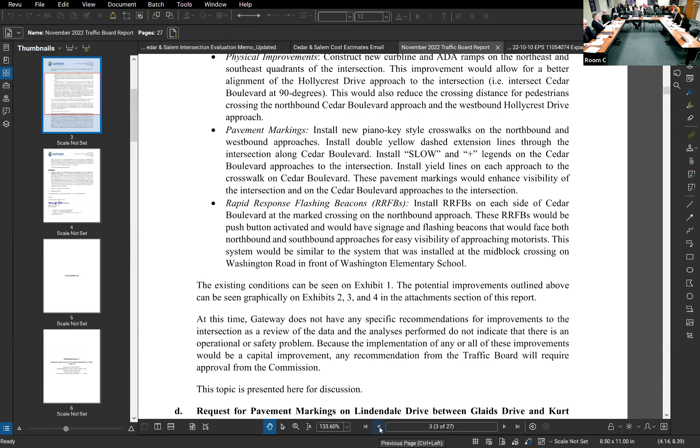Was it random or were they - there was the highest number, and it's in my traffic board report. I want to say the highest number was... here it is, here's crashed, I'm sorry. So there were 9, and other reportable crashes - 2 involved collisions with pedestrians.

Again, one was the one, and then there was another one, I believe, that might even have been the crossing guard. And then seven of those 9 were angle crashes involving a motorist who was going straight across Cedar Boulevard from Hollycrest. So that may have been a function of that.

If you're in the right lane, is that the lane that goes straight? Where either cars that were parked along Cedar, or someone next to them trying to turn left, and then they tried to go straight across Salem. So 7 of those 9 were that movement.

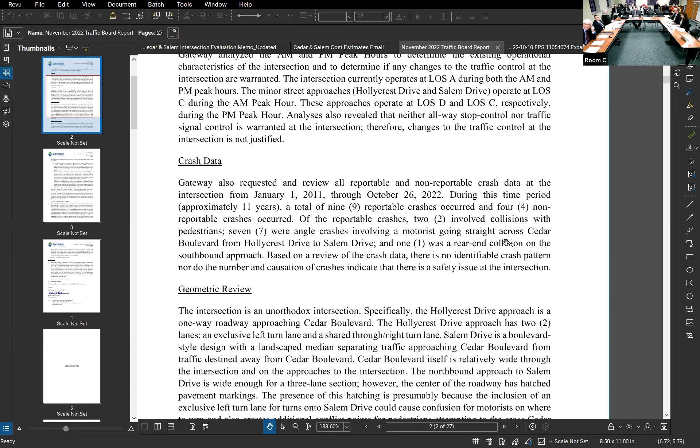One was a rear end, which was - if I remember correctly, if you read the report - somebody stopped in the southbound direction to let a pedestrian cross, and the person behind them was looking at their phone and rear-ended the person who stopped. Not necessarily a geometric problem. Correct - and reportable crash is a bit of a misnomer because they're all reported, but if a car is damaged or has to be towed, that's what qualifies as reportable. So there's the reportable, and then there's the non-reportable.

Terminology could be better - reportables have to be reported to the state. I was just curious, from the police report standpoint, that way we get the actual excuse if there was one, or the actual factual - witness statements are under that.

So from all of that, essentially what we said to the traffic board was, qualitatively and geometrically, there are some things here that are unorthodox. Some consideration would be given to improvements or modifications to the intersection to enhance pedestrian experience and safety, and enhance awareness of motorists traveling through the intersection.

So I'll step through each one. This first exhibit shows what we've already looked at on the aerial, plus some of the existing signs shown on that plan. The first thing we talked about - let me go back to this one - it's already posted and in the ordinance, no parking from where my hand is up to the intersection.

And then through the intersection and over to here, that's already posted no parking, likely because the through traffic was shifted over due to that hatching we discussed, and the unorthodox nature of where you have to turn left. Also, because Cedar Boulevard bends horizontally back away from Hollycrest, you don't want cars parked along this curb blocking the sightline - there's a sidewalk combination of things there. We also don't want pedestrians to have to walk out in front of a parked car to see if oncoming traffic is coming. So there's no change here, but parking along the curb for about 150-200 feet leading up to the intersection, and somewhat after it, is already restricted.

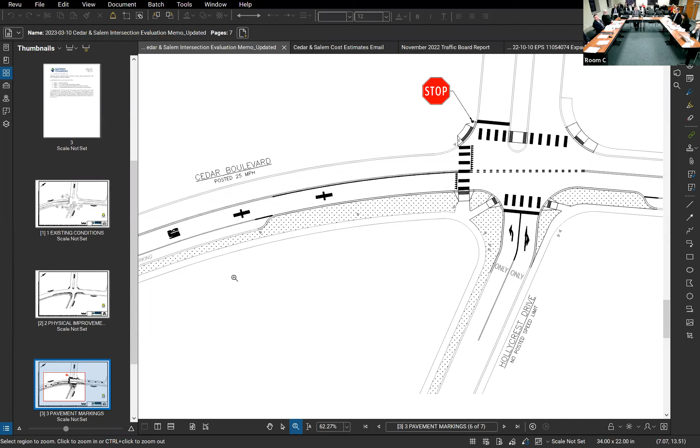And then another thing that's been shown to be very successful in reducing crashes at intersections—it seems simple, but it just raises awareness. If you look at the ground when you're driving, like I do, you've probably seen them around. One example is Orr Road and 19 and Upper St. Clair, right across from their fire hall, at the church there. You'll see, if you're driving on Route 19 approaching Orr Road, there's slow legends on those approaches with plus symbols, all white, thermoplastic. So as you're approaching it, it's just another thing for a motorist who's maybe not paying attention—they see these things, and at least it puts the thought in your head: okay, there's an intersection right up here, there's an intersection coming up.

So it's a cheap thing, and PennDOT's been putting them in a lot of places, and they've become a little more popular around. So just another thing for the motorists to give them awareness that they're coming up to this intersection, in addition to the enhancements to the pavement markings at the intersection itself.

Mike, did you look at, on Hollycrest, down where if you go left right there, down a little bit to the right, there's always parked cars there. So I'm just worried that evening it up to a 90-degree makes that easier to make the turn. I'm just wondering—that's a church there, right? Just to the, yeah, yes. There are always cars parked where that Hollycrest is. I just wonder if it makes it harder.

It doesn't look like you're narrowing it. No, but just knowing that there's always cars there, it just looks weird with that kind of 90-degree on the right side. It looks like maybe there'll be less room. I'm just worried if you have cars making that left and there's cars parked on the right—should we have no parking a little bit there? Maybe we need to push back the no parking sign where some of those cars are parked now, which then also may be problematic.

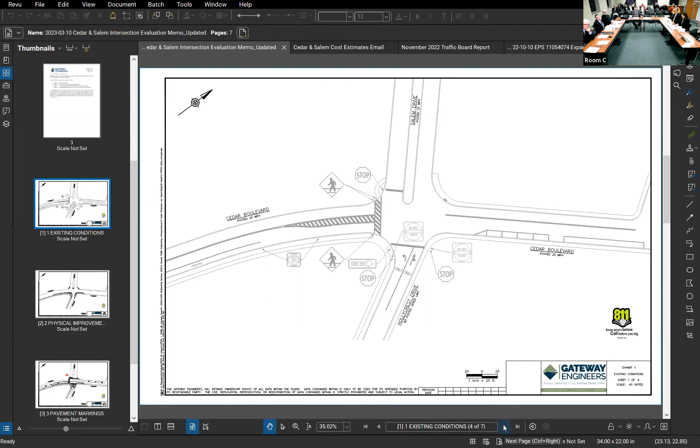Yeah, it might be that—I don't know where the no parking starts, but obviously nobody's hopefully parking in the lane that's marked. But there's also room that they could go around. Once you get to the point where you have a couple cars stacked on that left, it would block that right side with the way parking is. The answer may not be that there's any problem with this, because I think it looks good. It may be that we need to move that parking back a spot or two for better parking.

Signage for no parking - the bump out shown on that lower corner of Hollycrest is going to tie into and shorten up the crosswalk that exists now. There's a catch basin right there, so you'd have to do something with that. It was put in probably at least 6 years ago because that's an area that gets significant stormwater, so we added a catch basin there for additional capacity. We may just have to look at the location of that catch basin related to a bump out of that corner.

Out on Cedar - I switched to the aerial. You didn't see it, but I'm on the aerial here. If you pull up Hollycrest on that area, you'll see what I mean.

We're wondering, why not just make it one lane if cars are parked there anyway, taking it down to one lane.

This was just an idea, giving some initial thoughts, and then we could plan it out at a high level. This was concept stuff as a first shot at the traffic board, and through the discussion they just said, let's push it up to the commission. So it wasn't a whole lot more detailed - layouts and concepts were put together for that, and there's a lot of cars parked there now.

So Mr. Gurley, what do you think? I was going to say, if you pull up Google and the street view, you'll see exactly what I'm talking about - drop it right there, pull back from the church and look that way. It's not there now, of course.

But you can see this sign where it says 3-hour parking right there, and you can see the yellow lines up at the intersection. This has been my experience too - you'll see cars stacked up right to that point, one lane anyway, and that's allowable. You saw the sign - it's posted, parking allowed right up to where the curb has been marked with yellow.

That would certainly be a consideration. I have to imagine it's convenient because people can jump right out of that onto the sidewalk to go into the church - church, tennis, school.

So would this intersection be a good candidate for a roundabout? I thought about it - do I have enough space?

You know, roundabouts aren't great for disabled people. I'm sorry, but they really aren't, because disabled people need the traffic to stop and time to get across in a wheelchair or with a cane or a walker. I think the fact that you're pulling these curbs out into the street and essentially making the street appear narrowed is going to have a wonderful traffic calming effect at this intersection, which I think is going to be very valuable. There's a lot of speeding on Cedar Boulevard. I just don't think roundabouts are the answer to everything, especially not for disabled people.

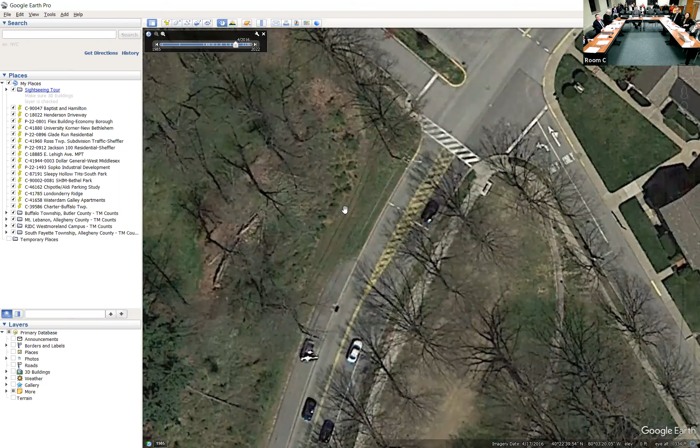Because what I'm thinking about is creating... from this intersection down to Greenhurst we have lots of pedestrians. People park and walk across the street and it drives me nuts. I drive through there all the time. It drives me up a wall, but the reality is we've provided parking on that far side, which means people are cutting across all running across.

Which is dangerous. And yes it's posted 25, but if I'm not creating some experience where people are actively thinking 'I am in a pedestrian heavy zone,' they're just gonna keep blowing through this, which I think this is a great step. But I recognize this is one piece of a broader puzzle, since I've got the parking down the hill, so I want to potentially create some kind of bump or experience that makes people realize this is a pedestrian space.

The other thing I'm thinking about is I want people walking up to La Gourmandine and to CVS and those places, and how do I want them getting there? Chances are I want them to cross here and then walk up to the intersection, if they were once upon a time going to Dollar General. I want them crossing sooner rather than up at that intersection up the hill, so how am I promoting crossing here so I'm not creating more density of activity up at that next intersection?

I mean this would obviously be a lot more expensive, but if we move the parking that's currently on the other side and put it on the high school side, right? Parking on the mountable curb is on the other side, and we turn more of the lane there and put the parking on this side.

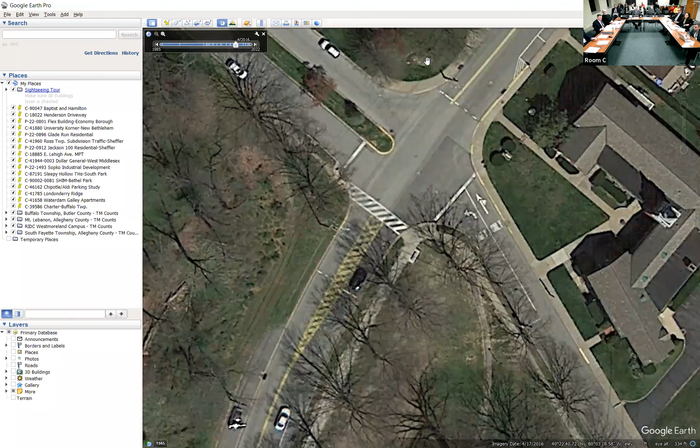Can I jump back real quick to the other one, and just to touch on the last point, also to Commissioner Flint's question about a raised crosswalk - I have to look at that a little closer. Okay, that's fair, we're throwing you ideas, you're brainstorming. There may be other issues that come up with a raised crosswalk.

Typically, a raised crosswalk is at a mid-block location, not at an intersection. If you're going to raise something at an intersection, you have a raised intersection, and that's the whole intersection, all four approaches are raised through it. So let me look a little bit closer at that.

And there's also some volume constraints to it too. There are certain thresholds. If you have a certain high volume of vehicular traffic, then you don't want to consider something like that.

Just one comparison I wanted to throw out - we collected some data at 19 at Cedar, that's Washington Road uptown, as part of trying to get PennDOT to allow us to close the curb lane for some extended hours. From 7 to 8 AM at that intersection with 4 lanes, the amount of traffic in one hour in both directions is as much as there is here in the evening peak hour.

Vehicular traffic? Vehicular traffic. So there's a lot of traffic coming through.

Can I add to the list, as long as you're checking on that raised crosswalk - if we can't do the raised crosswalk at Holy Crest, can a raised sidewalk be done with these people crossing by the tennis courts? Put something there. Essentially, not at this intersection here - this cannot be a raised sidewalk.

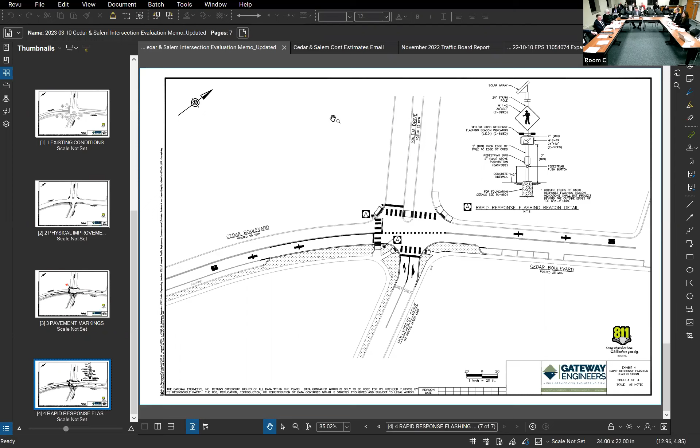You said 175 for all three, including the lights - at least this has at least, for each one individually, just so we have it. Those flashers, with all the equipment and the foundations and all the power and everything you have to get to an installation there - 5 years ago we were doing them for 40,000, but now all in they're 60,000.

And then, it's kind of back-of-the-envelope, but I did pull some quantities in for curbs and things like that to come up with that estimate of 100,000 - that's ramps, ADA ramps on all the corners that we talked about. And then all those series of thermoplastic pavement markings would probably be 15,000 or so.

The police did a study related to it, like Green Light Go, a couple of years ago uptown, and as part of that they wrapped in some conversation about the safety of those flashing crosswalks. I wonder if we can pull the information from that report to circulate it. Also, when that was put in, there was some grant money - State Senator Matt Smith was involved when that was put in.

And when they did that follow-up, I know Chief was in here talking about it. You may have even been in here, Mike, talking about when that study was happening and we had gotten a grant, and Lebo was part of that. There was a significant amount of conversation around the safety of those crosswalks, in particular the false safety that comes from those flashing lights.

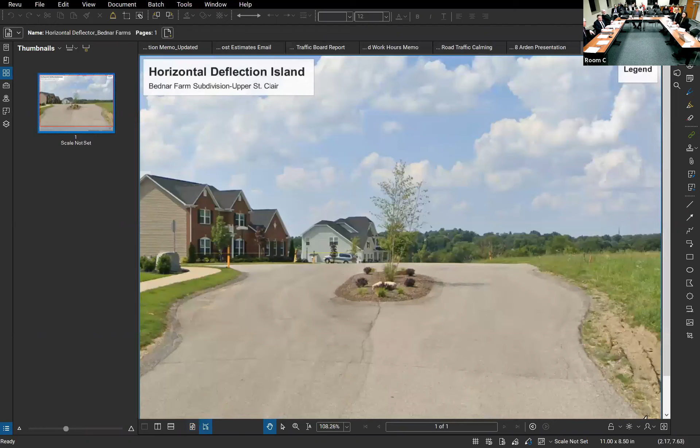Don't worry about it. I was just going to say, because we have that stormwater intake site, that's clearly going to add cost to that project. It will, but I would love to see some green stormwater infrastructure in that new green space instead of it just being grass. You can make it out as part of the engineering capacity.

Yeah, but we could do something better than just grass. The grass is a plus, but we could do it better. Water coming down, that's a good idea.

To wrap it up, I think you're hearing the commission is in support of the three ideas. We'd like to see some additional ideas, two, the addition of a mid-block crosswalk or raised crosswalk. We haven't coalesced around what to spend the money on, but we're collecting more ideas and want to add a couple more to the list. What can they do? What do they cost? Bring it back for discussion and then finalize what we're gonna do.

If we're gonna look at the cost of doing a mid-block crosswalk, we should also look at the cost of adding a sidewalk along that parking area, because that might encourage people to take the sidewalk to the next crosswalk rather than cross the street in the middle of the road.

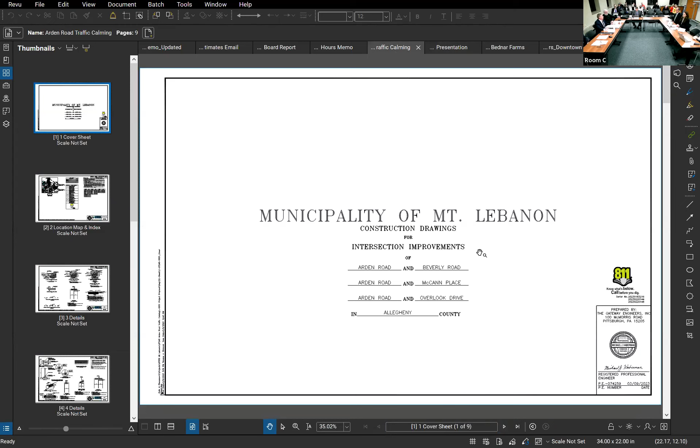As far as owning property, you obviously have what's paved now, the parking, but you would need additional space going up that hillside. We own that, it's the municipality's, and we maintain it, but it's just grass right now, needs improvement. Topographically, you'd have to do some grading to get a level enough surface to add a sidewalk section for an ADA site.

Unless we narrow the road and take the sidewalk from the road. Anything can be done, it's just a matter of if we can put numbers to it. At that point, the third lane is parking, so we'd narrow it to a single lane, put the sidewalk there, narrowing those spaces. But given that we're already at Arden Road, do we transition to that?

You got what you need from us? Absolutely, I do, thank you. In the interest of time, let's move to Arden Road, there's still two decision points.

I'll spend 10 seconds on this just to show you where we're at, we did all the survey and everything, and we've laid the design out. This is the Beverly and Arden intersection, pretty straightforward, we've created the geometry. We've made sure that fire trucks and so forth can make this turn like we talked about, so it's a little wider at the bottom than at the top. That's just a sneak peek at that plan.

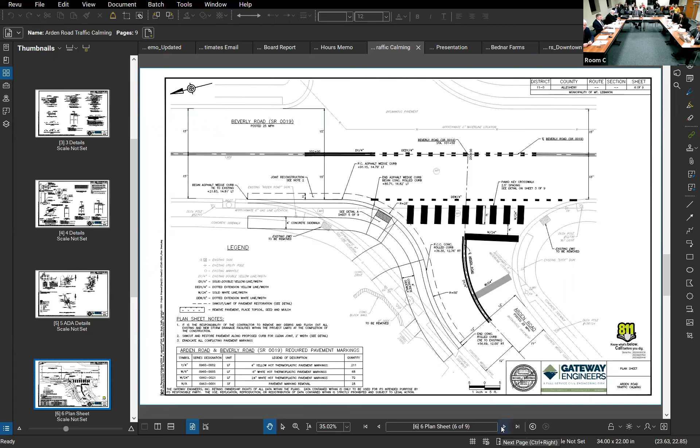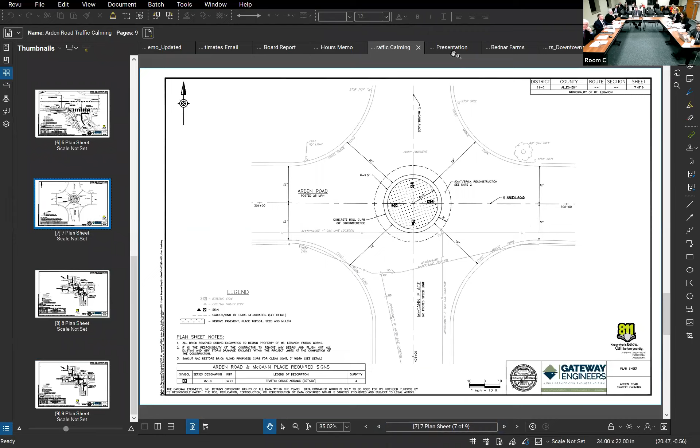So that's the ones we already decided on, and you're just showing us the latest schematics. Let me refresh. Do we want to talk about two or three speed humps, or the overlook intersection, maybe speed humps? It comes down to a question of whether or not we want two or three.

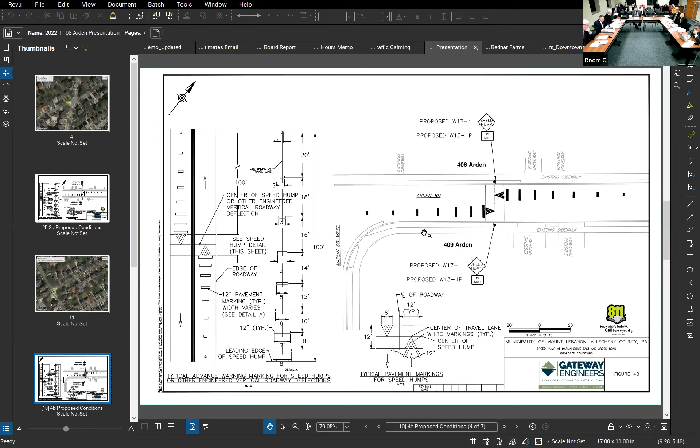We're settled on the one up at 287, 286 Arden, that's between North Meadowcroft and Overlook. That's never been in question. We're also settled on the one at 406 and 409 Arden, which is just east of Marlin Drive West. And the one in question is this one, where we originally had it proposed, at 424 Arden, 421, just off the screen here is Marlin Drive West.

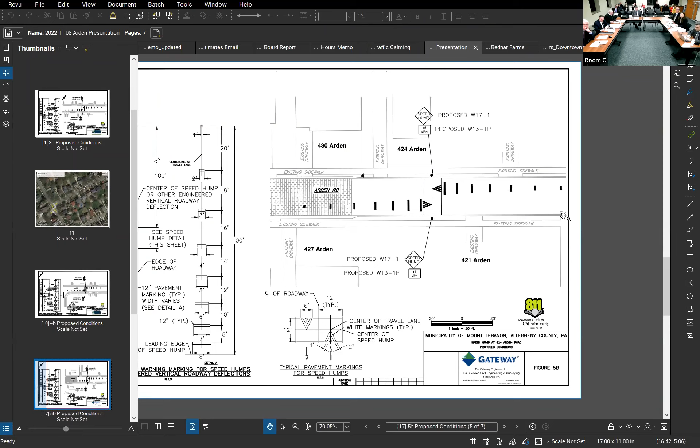This resident has expressed their concerns with that speed hump and said that they don't want it. Other residents on the same block have said that they do, and think it's integral to the plan. We came up with an alternate location. You can see kind of where the transition from the brick to asphalt is here and where we're showing the speed hump originally. We shifted it a little further west as another option, but that would require taking out part of the brick where it is, and the construction would require removal of brick and a 3-foot concrete section.

We'd be reconstructing, and it would be a lot more expensive than the $10,000 number we put on them, each one of them individually. That would be the difference.

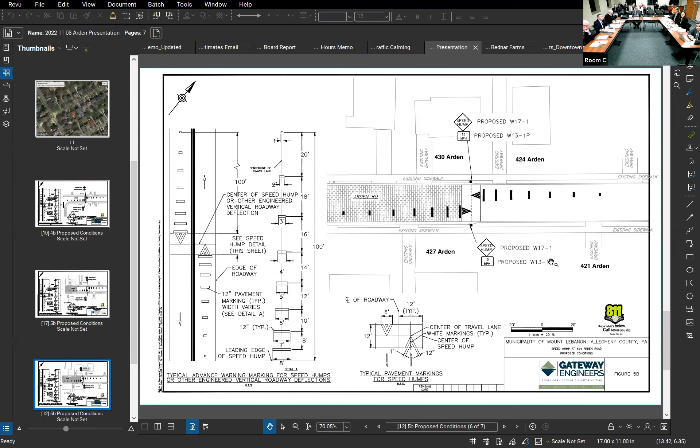Even under this scenario, my understanding is the resident still said that's too close to my property, I don't really want it. So I think if it's a decision of whether we're gonna have it, I think it wants to be where it wants to be, which is in the original location, or we don't have it.

And then thirdly, I think an option could be - Keith mentioned, and maybe Mindy has an interest, I don't know if you guys have an interest - but the municipality does have one of those temporary speed humps that you can kind of bolt down to the surface of the road.

If you put that in, you kind of have to have a mechanism to say you want to make it permanent. What's the end game there?

And then if you end up removing it and not going permanent, then you have about 10,000 holes that were drilled in the pavement, and that's gonna fall apart. So if you put a temporary speed hump in and then remove it, you still have some cost to repair that - you're probably gonna have to overlay that section of road.

So our choices are 3 speed humps or 2 speed humps, and if we go with 3, we could install a temporary speed hump. Is that really my summary of it?

The recommendation of the traffic board and the engineer's recommendation was to do 3, because that's the maximum traffic calming we could achieve. That was in the final plan that the traffic board recommended and that the neighborhood as a whole reached consensus on. The question and concern that came up from this resident was after all of the traffic board and neighborhood meetings with residents.

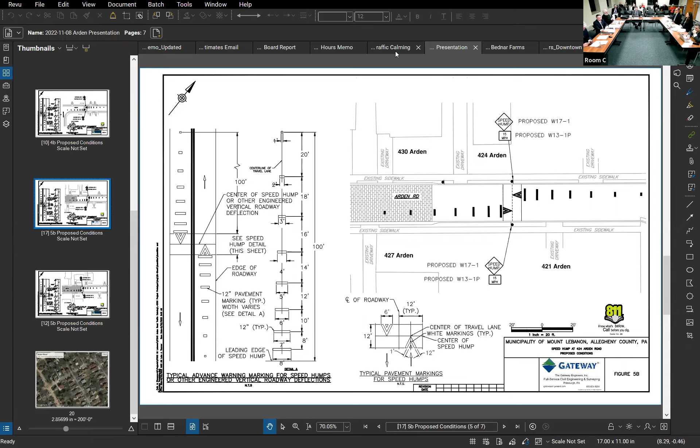I'm always for safety over one resident's wishes. I'm sorry for that resident, but safety rules. Thank you, okay.

Then the last one is our favorite intersection, Overlook. We've talked quite a bit about that. Right, we couldn't make a decision for the last 3. We've got 7 minutes on this, so we can do this. Yeah, I think this is...

The geometry of it is gonna be the same as what you're seeing here. This is the actual survey out here, these are the actual curb lines. Turns out that what we kind of created from the aerial mapping is actually a little bit wider through this offset area than we had estimated from our LiDAR than when we actually surveyed it. So we're able to get this island in here and get the geometry in here so that even at its pinch point, right at this little point straight to here, it's still wider than 12 feet. Not as bad as we thought.

So this little pinch point would have to be up here. You can almost see the curves kind of tapering and getting a little bit wider and wider. So we were able to keep it similar size and we actually have a little bit more room for the turns than we thought we did. So we cleaned some of that stuff up. Here's really what the difference is gonna be.

What we're showing here is all concrete, raised concrete, and we were showing essentially 2 triangular shaped raised islands, and this would be concrete mountable curb. So it wouldn't be barrier curb like you would see out, that's perpendicular to the ground. It's gonna be at a 45-degree angle that a vehicle could actually mount it.

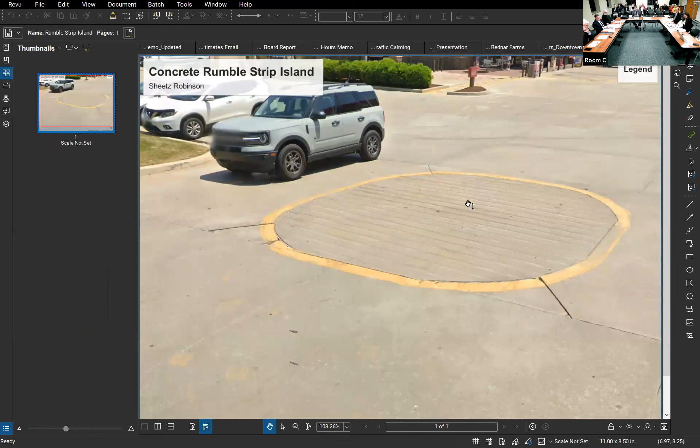I'll show you what that looks like. It looks like that. And then you would still have the markings, you'd still have those delineators, which I also showed a picture of. Here's what these delineators that are in there would look like. So if I go back to here, these little triangular, or diamond shaped things, those are the delineators, so they would all be yellow.

Okay, so there'd be 3 of them. We'd have a yellow line around it, that's what the dark line is. And then you'd have that flush concrete, so we'd still have the tracers, so you'd still steer you out to there. The only real difference is there is...

If a fire truck did want to make this move, which again we've talked about, depending on the side of Arden that a fire truck's going to, I don't know that one would, in an emergency, come up Arden. I think they would have to come in another way.

The chief is pretty clear here, just so I want to see another way, right? Chief, do you have a preference for either one? I think if anything, we would come up overlook from Beverly and either make a left or a right. There's no preference here?

Raise curb, I'll run it over if I have to. Well, that's the idea. The idea was that either one of them could be run over. This one would be less concerning to run over than having to drive up over, you know what I mean?

Yeah, is why you do the raised curb, because it's less likely somebody's gonna come run over a kid. The fire truck can get over it as long as Nick feels that the fire truck, if it's raised, can get over it if it has to. I think we raise it.

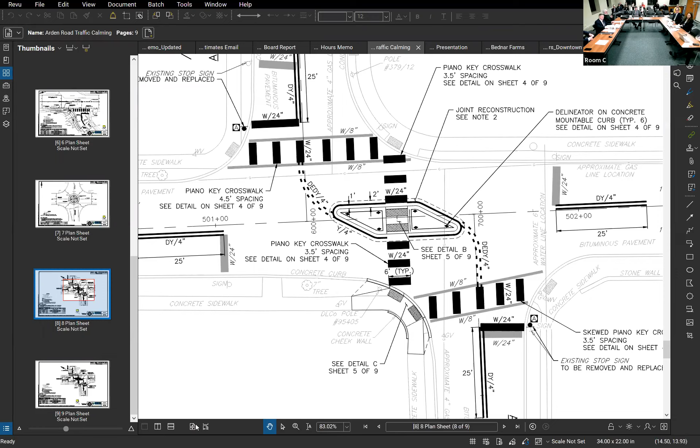So we're yes with the concrete raised, but maybe add brick if you can. We'll shoot a picture off of what that would look like. We can render something real quickly, just to get a visual on it so everybody's okay with it. We'll have Keith get that over to him. We have other examples in the fourth ward where we've done this.

Any other thoughts? It sounds like we have 3 votes to proceed. I'm a yes. I'm a yes. That's already on this. No, let's hear it.

If we're trying to reduce traffic, and that's what we want to do, I said this before, I said it in an email, I said it in the meeting, putting no left turns on these, I think gets it done. And it's a lot cheaper and a lot easier. So I know there's conversation about people going to other areas, but if what we're trying to achieve is a little less traffic, and we make it harder for people to do a certain thing in that area, the traffic will be reduced.

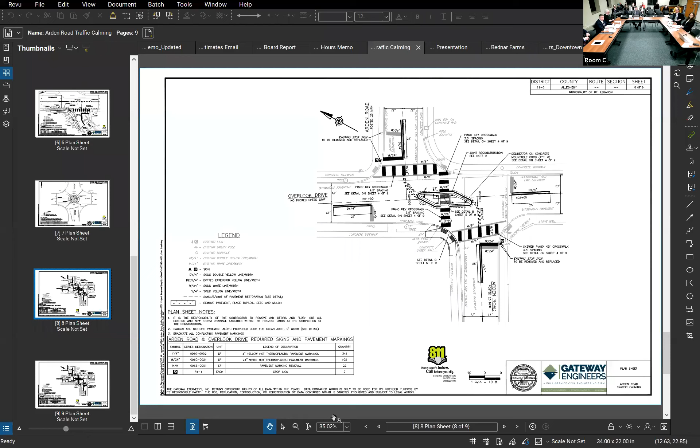But it's not just about the traffic. Once again, you have to remember where people cross. You can't make people do what you want them to do, cross where you want them to necessarily. They're going to cross where they're used to crossing. That is a really wide intersection. And I go right back to disabled people, people with kids in strollers and dragging one along by the hand, et cetera. I think making that intersection safer for the pedestrian is just as important as reducing the traffic.

I fundamentally disagree with your comment that you can't force people to cross where you want them to cross. That's the idea of a crosswalk. That's literally what it's for.

Okay, I'll give you an example. You remember the old Gimbel's Garage downtown? It's the garage where 8th Street comes into Liberty, and you can go straight across into the garage. For years, the parking authority tried to discourage people from cutting through when it was raining and snowing. Finally, they hired an architect who said, no, let's make a safe pathway through the garage. This is Pittsburgh. The weather is lousy.

That's what they ended up doing, raising a little sidewalk through it, and people use it to this day. They made it safe, because try as they might, they could not get people to stop cutting through and cutting in front of cars and traffic. That's what I mean — you really have to think about how people use things and adapt.

Yeah, I agree. As I've told you all, humans are gonna human. The goal isn't — I don't think we can say no, right? That's just a reality. You can try to say no, but that requires enforcement, which is a capacity issue. So the question is how do you encourage the best behavior and create a safe space where they're going to do what they're going to do anyway? A crosswalk's purpose is to encourage them to use the safest path, but that requires us to design it as safely as possible.